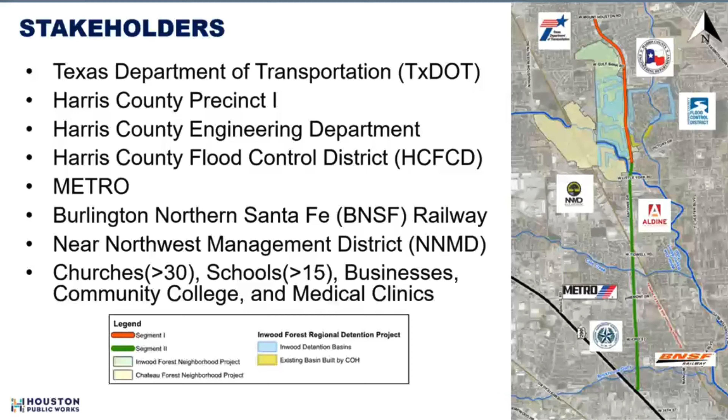Our project team internal to the city: the project manager is Rowaidah Ayoub, and the managing engineer leading that team is Sherry Kang. We also have our consultants here, who are also the program managers for this project, Gauge Engineering, with Muhammad Ali, Derek St. John's, and Karam Kado from Gauge Engineering. Thank you all for being here.

Thank you, Tanu. So, what to expect in tonight's presentation: first, we will discuss the details of the project. Next, we will catch you up to speed on the design updates since the last public meeting. Afterwards, we will discuss next steps, which will then be followed by our question and answer segment.

Here with us tonight to delve into the project details and updates is Principal for Gauge Engineering, Muhammad Ali. Muhammad, thank you for being here. Thank you, Ryan. Good evening, everybody.

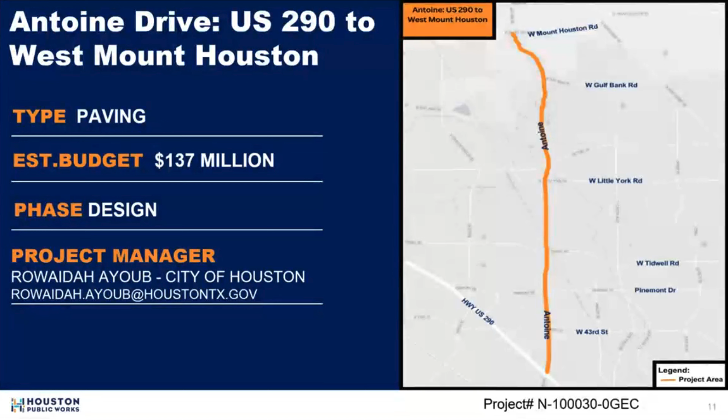Some of the benefits of the project: it will improve north and south mobility, alleviate congestion, and also be a big catalyst for economic development in the area. If we go to the next slide, please, Ryan.

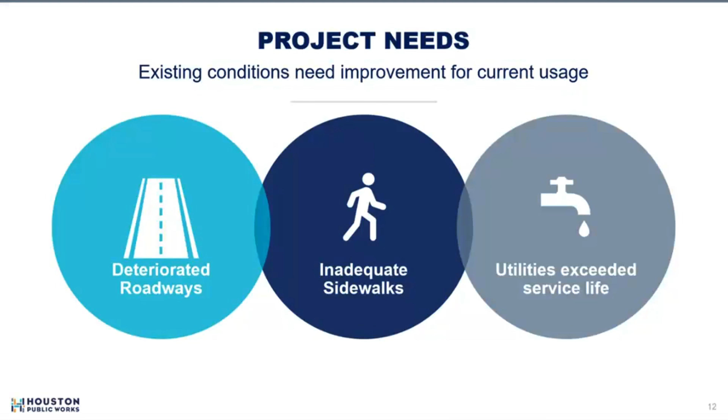In terms of the project needs, the Antoine Drive project has been part of the city's capital improvement plan for a long time. When you evaluate existing conditions, you'll notice the project has many needs. The roadway has deteriorated over time and settled in some areas, with cracks and potholes, so it needs to be replaced.

In addition, the sidewalk conditions are inadequate, they don't meet current criteria, and over time the different sidewalk panels have settled and need to be replaced because it makes it hard for people to traverse the sidewalks. The existing storm sewer needs to be replaced and upgraded to meet current drainage Atlas 14 requirements. And the water and sanitary sewer have exceeded their useful service life and also need to be replaced.

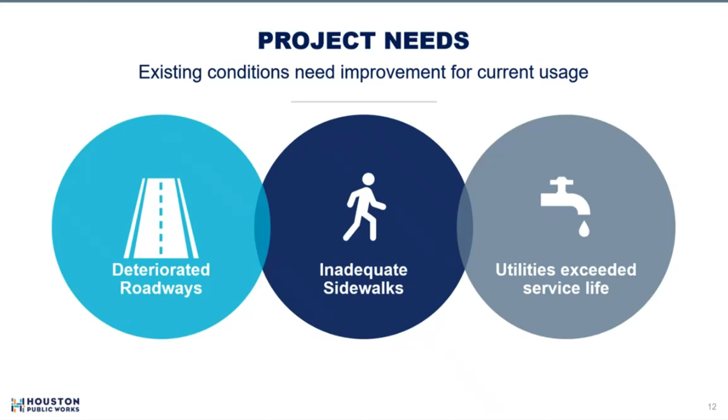Next slide, please. So what are the project objectives? We want to reconstruct the corridor with new roadway and drainage infrastructure. We also want to improve mobility and safety consistent with the mayor's guiding mobility principles, which I'll talk about later in the presentation.

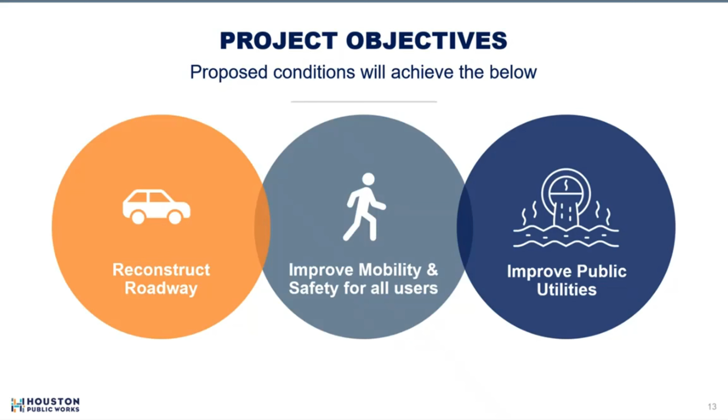In addition, we also want to improve public utilities, bring the stormwater up to current standards, and replace the water and wastewater utilities to match the life of the roadway, so we don't have to be upgrading them as we go. Next slide, please.

Here's the summary of the full scope of the project: full roadway reconstruction. We want to improve the sidewalk conditions and promote a pedestrian-friendly corridor. We also want to upgrade the intersections to make them safer for all modes of transportation. There are a number of traffic signals along the corridor, so our goal is to replace them with new traffic signals compliant with new city requirements.

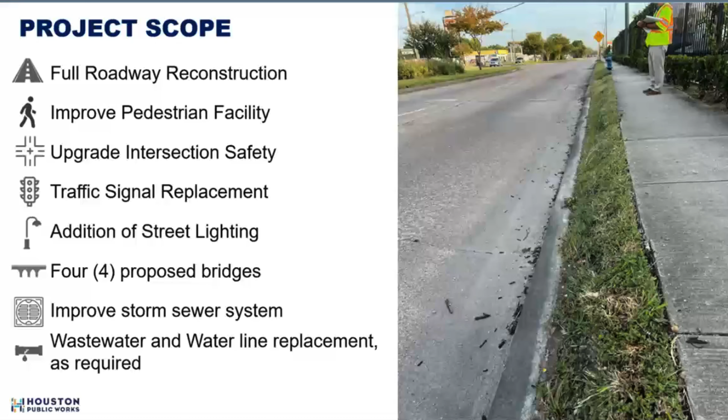We also want to make sure we have adequate street lighting along the corridor to make motorists more visible for pedestrians and pedestrians more visible for motorists. There are also 4 proposed bridges along the corridor. Again, we want to improve the drainage conditions to meet the post-Harvey requirements of Atlas 14 and reduce overland flow into the neighborhoods and flooding in general. And the last one is to replace the wastewater and water lines as required.

Next slide, please. So here is the project. You can see we broke it up into 2 segments. Let me get everybody's bearing straight: north is to the right, the solid line on the left is US 290, and the green line is Antoine Drive. You can see it spans Council District C with council member Kamin, then goes into Council District A with council member Peck, and continues up north. Once you get past West Gulf Bank, just north of that, it goes into Harris County's jurisdiction.

Currently we have the project broken up into two segments. Segment 1 is ahead of Segment 2, and it's also more streamlined, not as complex as Segment 2. It doesn't have any bridges or crossings. That's one of the reasons we broke it up, so we can advance Segment 1 quicker than Segment 2. In Segment 2, there are 4 bridges, 3 over channels and 1 over a railroad crossing. If we go to the next slide, Ryan.

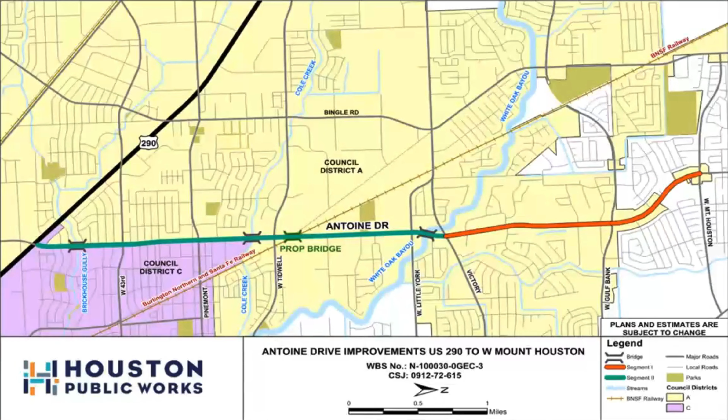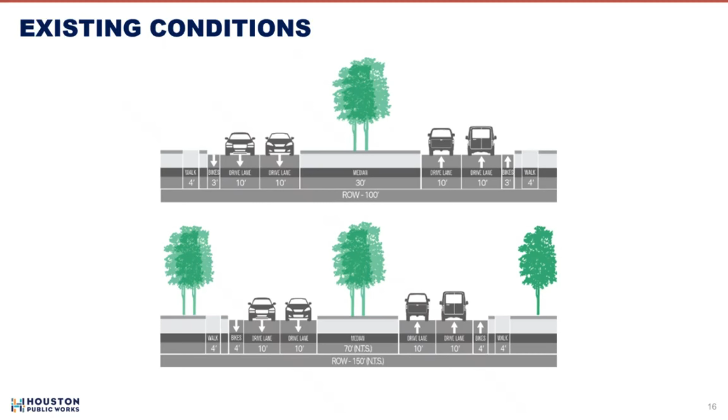If we go to the next slide, Public Works heard you loud and clear, and the city heard you loud and clear. So we wanted to share the results with you and let you know what we plan to do with the roadway section. Now, I mentioned the mayor's guiding mobility principles earlier. This is something the new administration has implemented, and it involves maintaining general purpose lane width and number, providing safe sidewalks and pedestrian crossings, and ensuring reliable service for emergency responders. All three of these goals are part of our project.

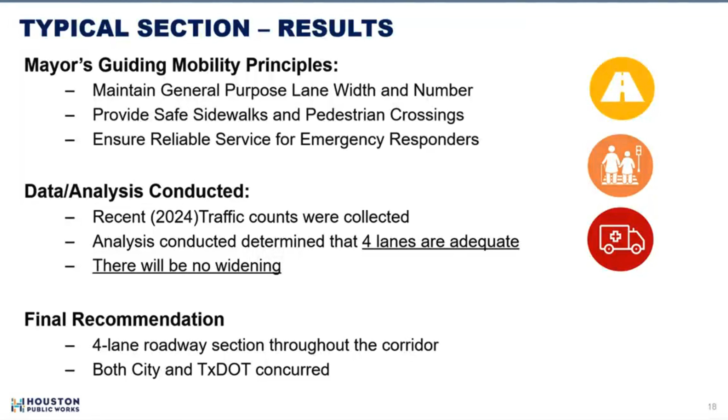We wanted to talk a little bit about the shared use path. Again, as mentioned, for this project the administration wanted us to also conduct or collect bicycle counts, more recent bicycle counts. We did that in late 2024, and the bike counts that were received were lower within the city of Houston limits.

It was determined that these counts do not justify the need for a shared use path. So for that reason, the final recommendation for the typical section from US 290 to just north of West Gulf Bank, is to go with 6-foot sidewalks on each side.

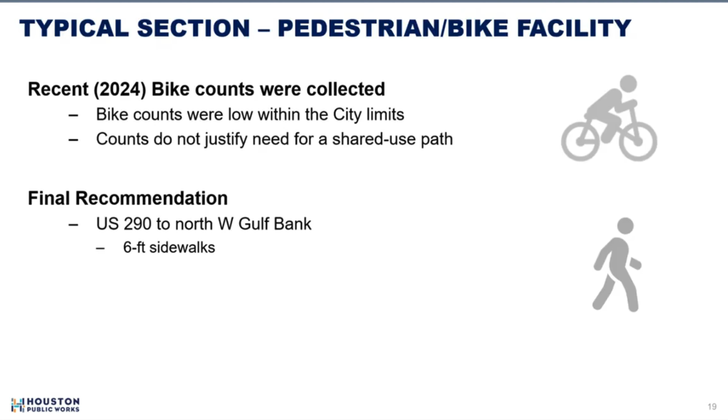And then we're going to have a 6-foot buffer area between the 6-foot sidewalk and the travelway. The buffer area creates a safety buffer for pedestrians. It gives them that comfort and creates a little bit of space between them and the motorists so that they feel more comfortable and so that it's safer for them to traverse the corridor.

We're also going to have a 6-foot buffer from the sidewalk to the right-of-way line. Within that area, we're going to be relocating the overhead utility poles to the outside near the right-of-way line. The objective is to get the overhead utility poles out of the tree line so that the trees can grow and flourish and not be impacted by the overhead lines, where we would have private utility companies coming out there trimming the trees to avoid them reaching the utility poles. So we want to make sure we don't run into that, which is why the poles have been shifted out.

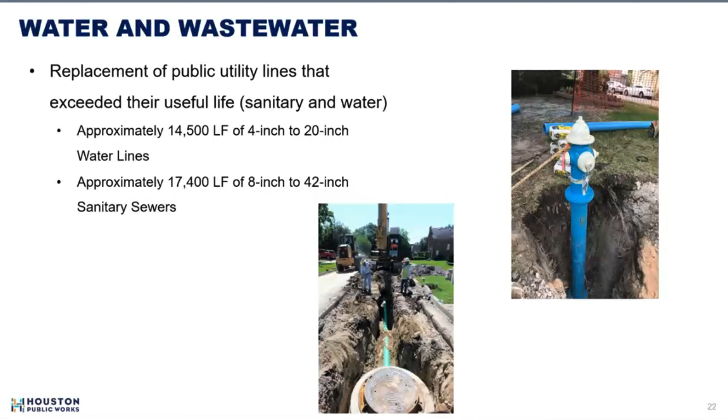I also mentioned earlier that we're going to be upgrading the water and wastewater, all the public utilities along the project. That's over 14,500 linear feet of 4-inch to 20-inch water line, and also over 17,000 linear feet of 8-inch to 42-inch sanitary sewer improvements. So those will also be done as part of the project. Next, please.

In terms of bridges, I mentioned the 3 channels where we're going to be replacing the bridge to make them wider, to accommodate the new typical section, and also to accommodate pedestrian movement through the bridges. Right now it's inadequate, they're narrow, so that will be fixed.

In addition to that, we're also going to build a grade separation over the railroad right-of-way, BNSF's right-of-way. This is a rendering that we had developed just to show you and give you an idea of what that's going to look like. So we're looking to build that directly over BNSF's railroad.

We're also looking to build a pedestrian bridge over the railroad to help students and parents when they take their kids to the schools in the area. They'll be able to use that to get around if there are trains, and it'll also provide safety for the pedestrians that traverse the corridor. Next, please.

In terms of traffic signals, there are a total of 12 existing traffic signals along the corridor. There's also a hybrid beacon at White Oak Bayou, and railroad warning signals at BNSF. We're going to be rebuilding 11 new signals. This traffic signal at US 290 we do not plan to touch, because the project starts just north of that.

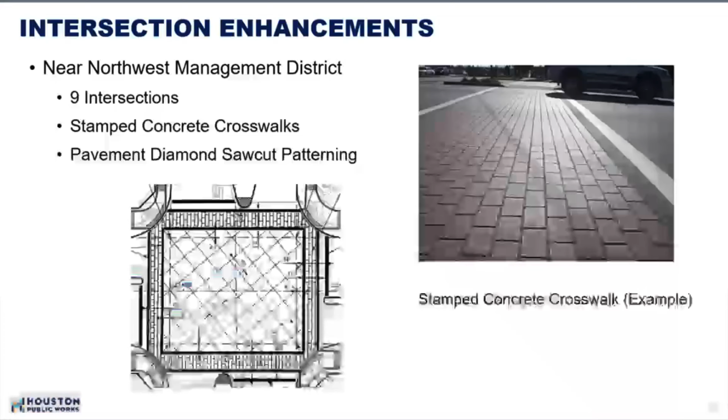Yeah, so basically the way the grade separation over the railroad works is once we get past Tidwell... right there, that's it right there. So it's really going up over the railroad.

We're using the minimum and maximum grades that we can use for the bridge to go up over the railroad and then come back down. Yes, we will be coming down before Tidwell, and we're making sure there's adequate distance for us to go up and down and still have enough sight distance. There will also be warning signs there, making motorists more alert that there's a traffic signal coming up. So all that will be done as part of the design.

Taking it over Tidwell is going to greatly increase the project cost. It's also going to require significant right-of-way acquisition, and it will really complicate things. So we did look at that at a high level, and we didn't recommend going with that option because it will greatly complicate things.

Thank you, Mohammed. Yes, sir. All right, this is a unique question I haven't seen yet.

Have fault lines been taken into consideration? There have been panel replacements done on Luann Street and neighboring streets. Some have been replaced again, and subsidence also occurs. Fault lines may have been the culprit. Do you know anything about fault lines in the area?

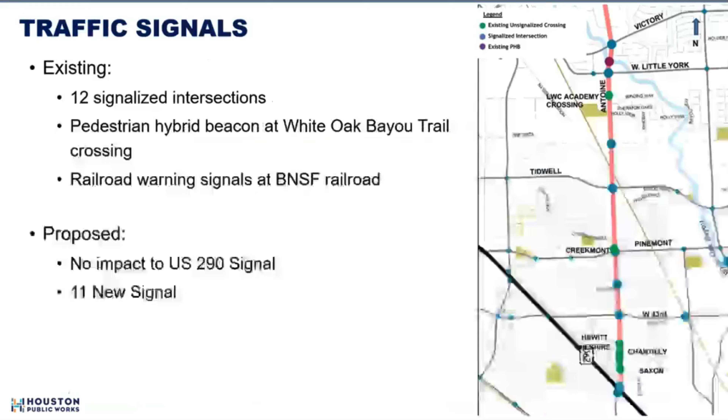So that is something we have submitted to Public Works, and I believe it got approved. Sherry, I think it got approved, is that correct? I believe we did meet with Multimodal and discuss that, and we've submitted and got it approved. Rowena, do you know the status? It did get approved, yes it did. Okay, thank you.

All right. Wow, this has been a great question and answer segment. Let me see, I'm just going back through some of these questions to make sure that we covered everything. Ready?

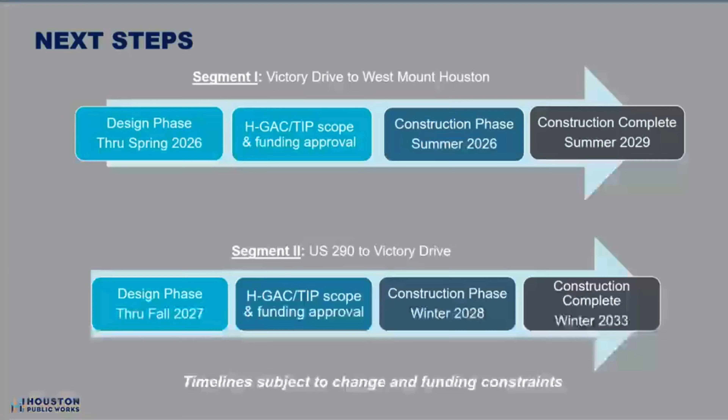Someone's asking, is there a graphic for the proposed right-of-way section? If you want to go back to that slide and go over it one more time. The 150, is it 150? This is the 100, I don't think there's 150 feet, but they refer to it. Is that a section that we're proposing? We showed that in the existing conditions. Thank you for that clarification.

Thank you, Mohammed. All right, let's see.

I have several questions in regards to the bike count. So I guess people in the comments, or in the question and answer, are asking about the bike count. Was it a low number? Could you guys elaborate? Let me take that.

This is Tanu. The bike counts were not done by this project team necessarily. It was done by transportation and drainage operations. We don't have the exact counts handy right now, but we can respond to those questions at a later time when we have the data. But basically, the counts were low. We can signify that the counts have been low in some of the segments. It was really low.

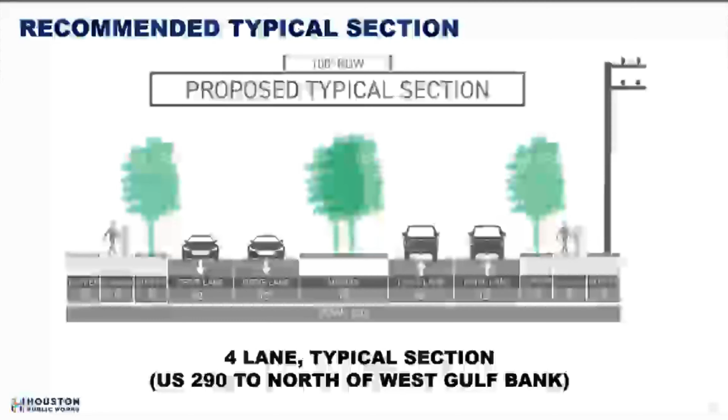So this project has federal funds and has to follow some of the TxDOT guidelines and requirements. So typically when you do a major thoroughfare project, the minimum lane width is 12 feet. So that's what we have, that 12 feet in there to match that. And it's also part of the mayor's guiding mobility principles to ensure reliable service for emergency responders. So by having the wider lane, it'll make it easier for emergency responders to get what they need without any delays.